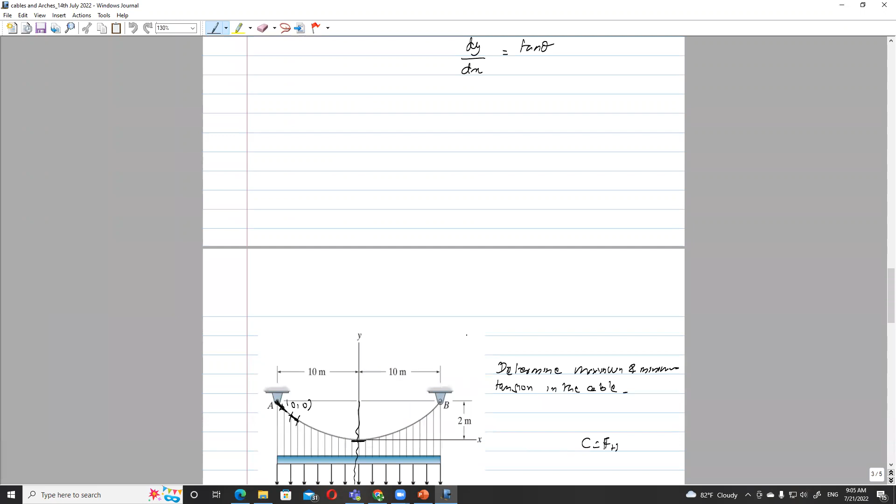Let me share the screen. So we were looking at cables and arches. The first part is cables. We have derived a few equations, and you may remember we did this problem as well. Let me once again revise the theory behind cables, and then we can continue with another problem.

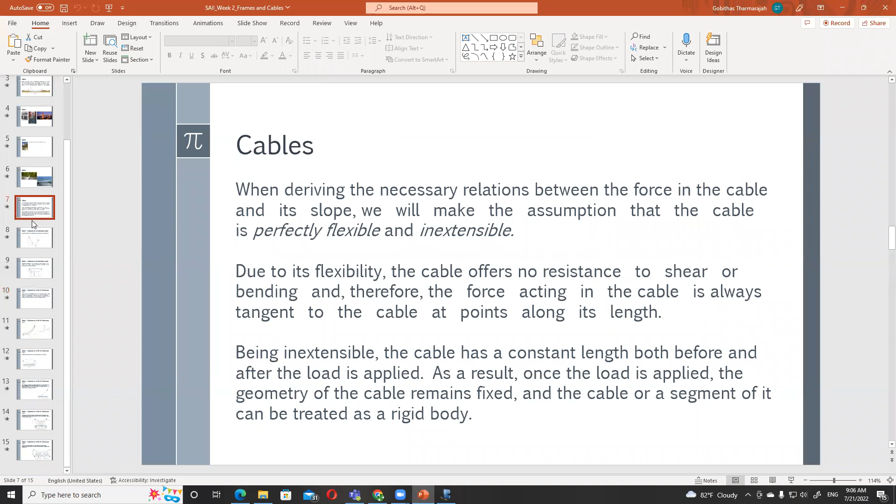Cables are a type of structure, a cable-stayed structure. When trying to find the forces acting in a cable, if you look at a cable like this, you may have tension acting on it, because cables can carry only tension, and there can be a load acting on the cable. If we consider the equilibrium of this, we can derive this equation.

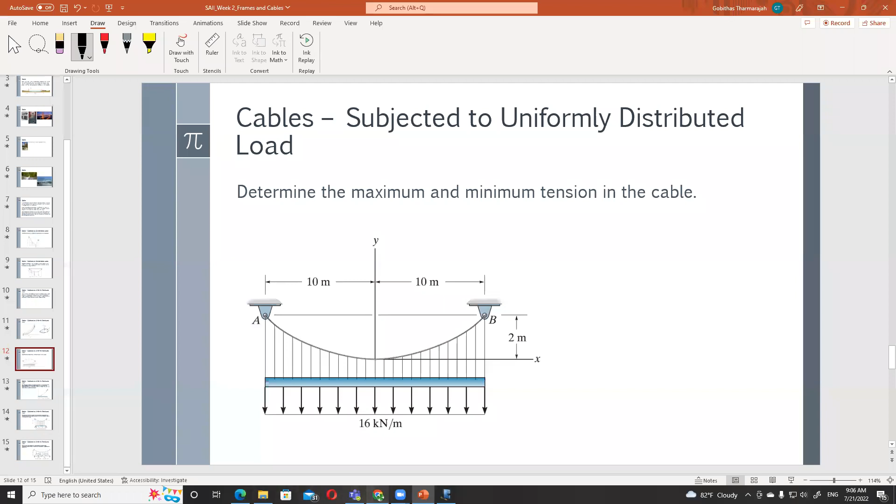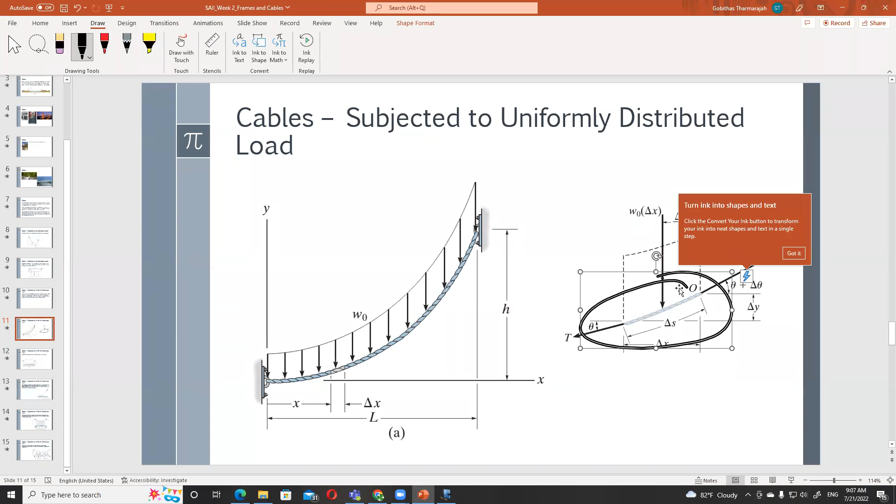So that is the equation we have derived. If you consider the equilibrium of the cable, let me copy this as well. So if you consider this, then taking it horizontally, this is the equation you have: T cos theta, this component.

T cos theta is in the negative direction. In the positive direction, T plus delta T, cos theta plus delta theta, that is equal to 0 if you consider the horizontal direction. As theta approaches 0, if you divide this by delta x, all of them, because as theta approaches 0, delta x will approach 0, this will become 0, and this will become 0, and this will become dT over dx cos theta.

So dT over dx cos theta is equal to 0. That is the first equation, as delta x approaches 0, theta will approach 0. So that is the first equation, applicable to any cable, not just this one.

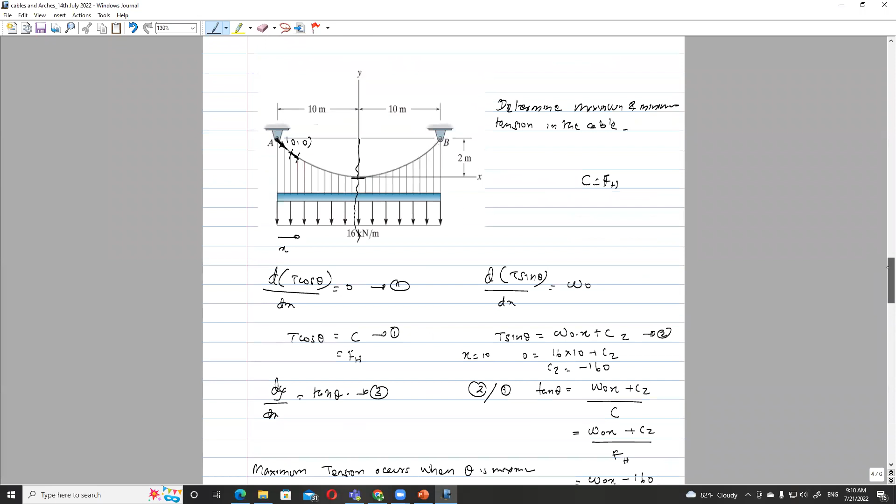So the two equations we have: equation 1 for cables is dT cos theta over dx equals 0. The other one is dT sine theta over dx equals W naught. That is equation 2.

dt sine theta over dx. This is valid for any cable. So basically we will start with this equation.

Then we need a relationship. You might remember we have derived a relationship, that is this one. This is W naught delta x into delta x by 2.

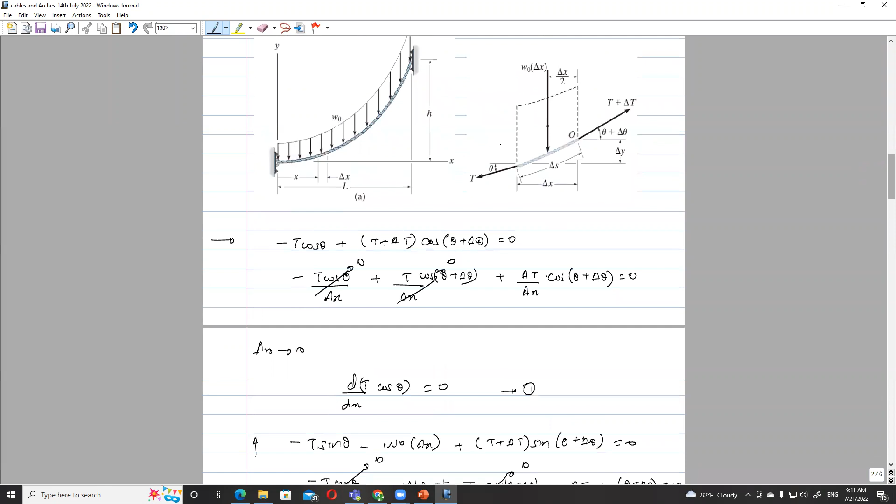That is taking moment from this point at O, so taking moment at O.

So when you do that, you have this equation, that is W naught delta x is the load and it is acting at delta x by 2, that is counterclockwise. T cos theta into delta y is clockwise, T cos theta into delta y is clockwise, and T sine theta into delta x is 0.

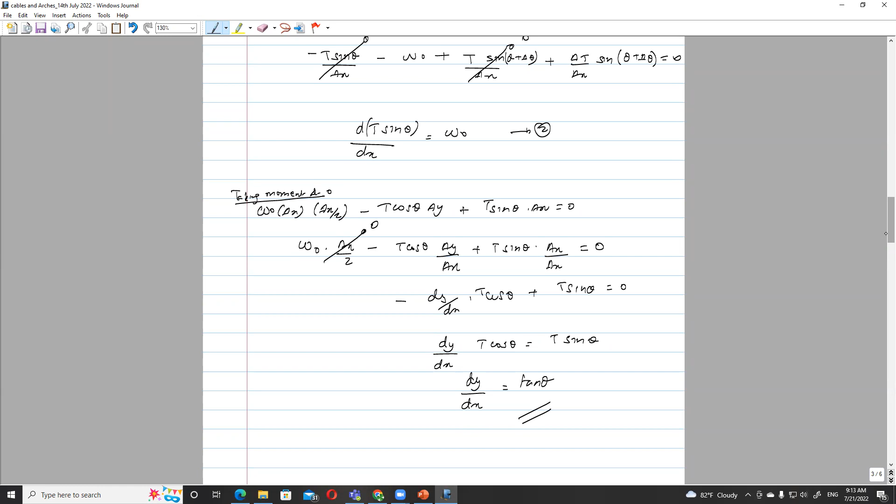Here this is t sine theta. So dy by dx t cos theta is equal to t sine theta, and we get another equation dy by dx is equal to tan theta. So the equation 3: dy by dx is equal to tan theta. So these are the three equations.

Here theta is the angle that, or when you have the parabolic or the increase of the angle in the cable. W naught is the load acting on the cable, and x and y are distance. Y is vertical distance, x is horizontal distance.

So now let's take the second problem. There's a cable AB subjected to a uniform loading of 200 Newton per meter, acting on the cable. If the weight of the cable is neglected and the slope angles at A and B are 30 and 60 degrees.

So it is not 0 here now. It is 30 here, 60 here, respectively. Determine the curve that defines the cable shape. So we need to define the cable, the curve that defines the cable shape.

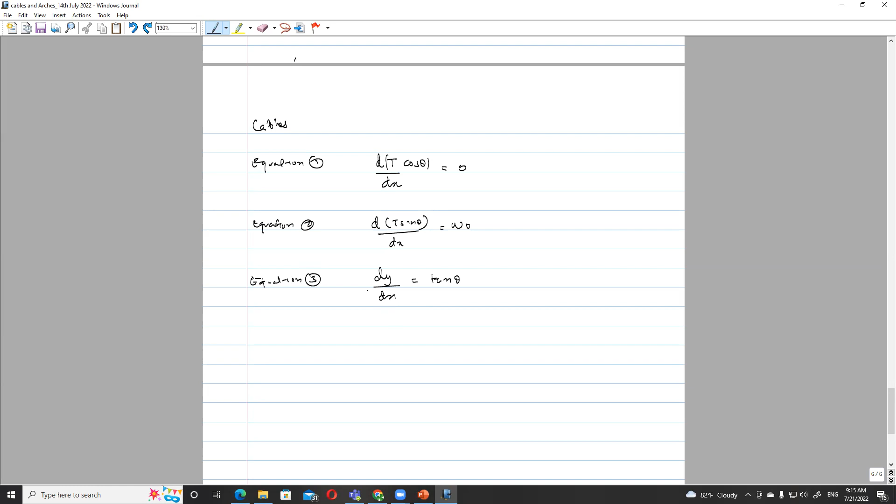So that equation will come from this y and x. If you substitute this into a format, and if you integrate, you'll get something in terms of y and x. That is the relationship we would like to derive now. And the maximum tension developed in the cable.

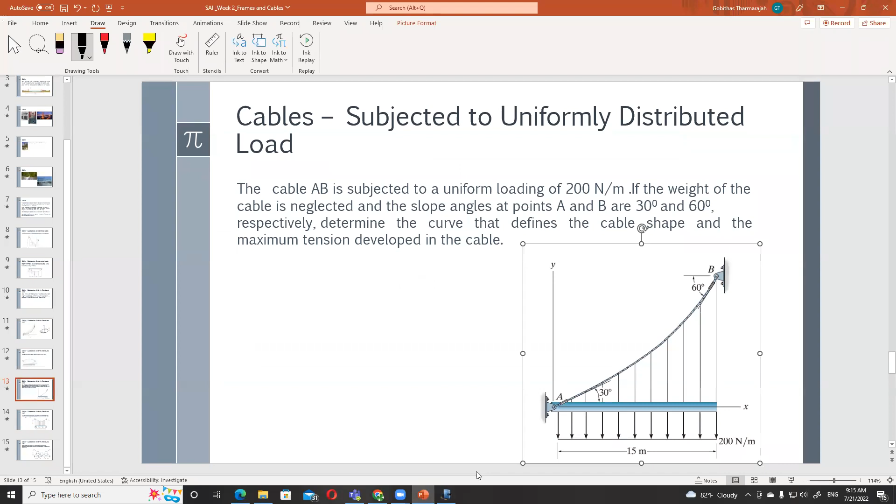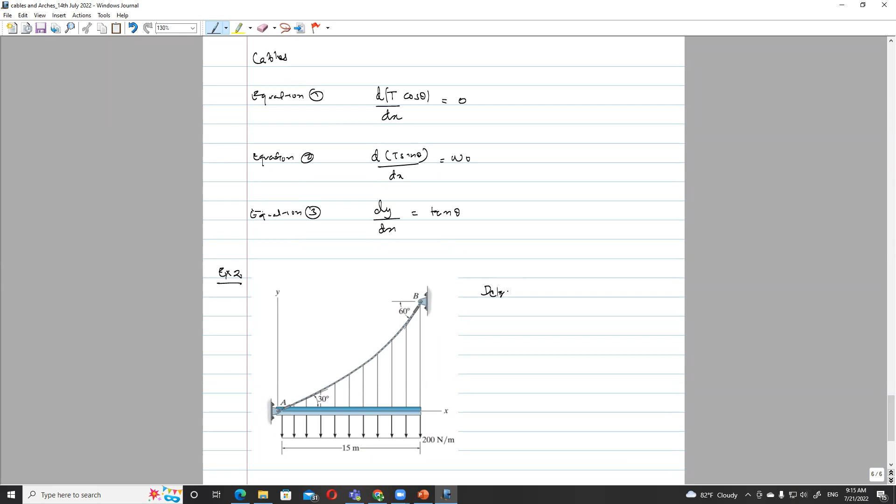So let me copy this one. Work example 2. So determine the curve that defines the cable shape and maximum tension developed in the cable.

So in this case, we know that these are the equations we have. So we need to use these equations. Now here, the load acting on this is 200 Newton per meter. So the dt sine theta over dx is W naught, which is 200.

So if you use equation 2, dt sine theta over dx is 200. If I integrate this one, t sine theta is 200 x plus c1, because I'm not integrating in a range. T sine theta is 200 x plus c1.

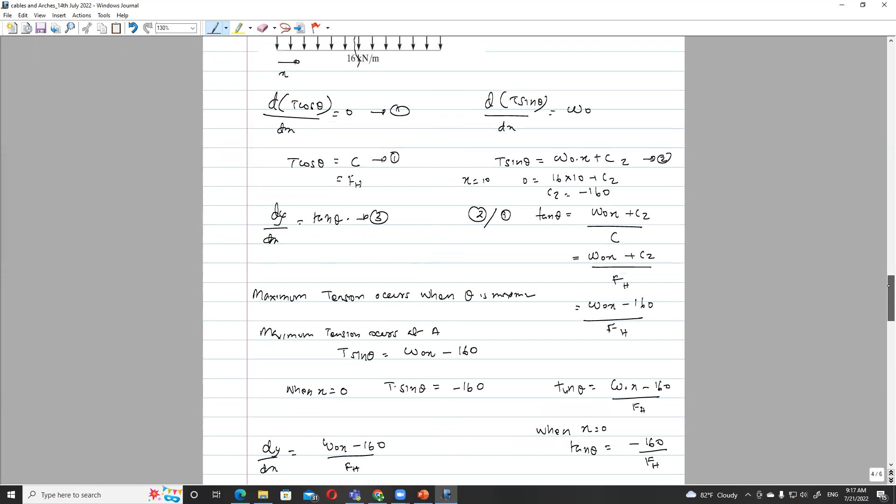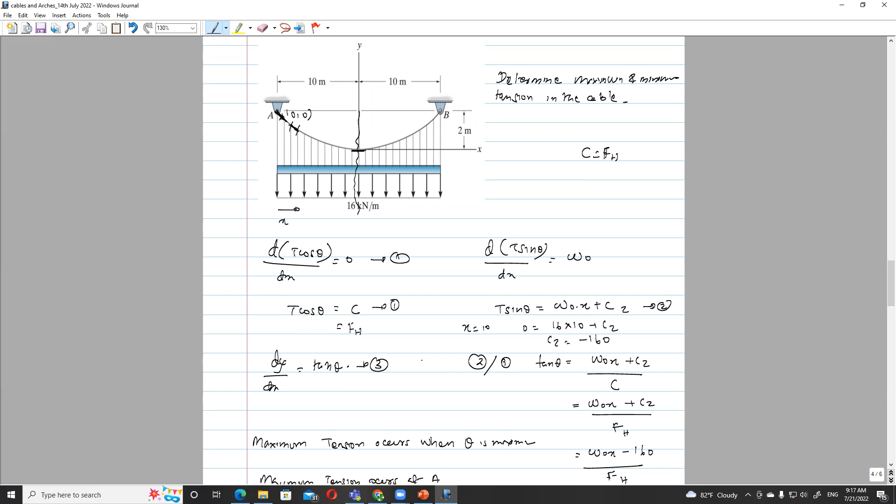You can remember that in the previous examples also we did the same way. We integrated t sine theta and t cos theta. So like that we have to work out. So t sine theta is 200 x plus c1.

Then the second equation, the first equation, if you use dt cos theta over dx, t cos theta dx is 0. That means t cos theta is equal to c2, that's a constant. That means if you take a horizontal component of the tension acting in this cable, that horizontal component is constant anywhere.

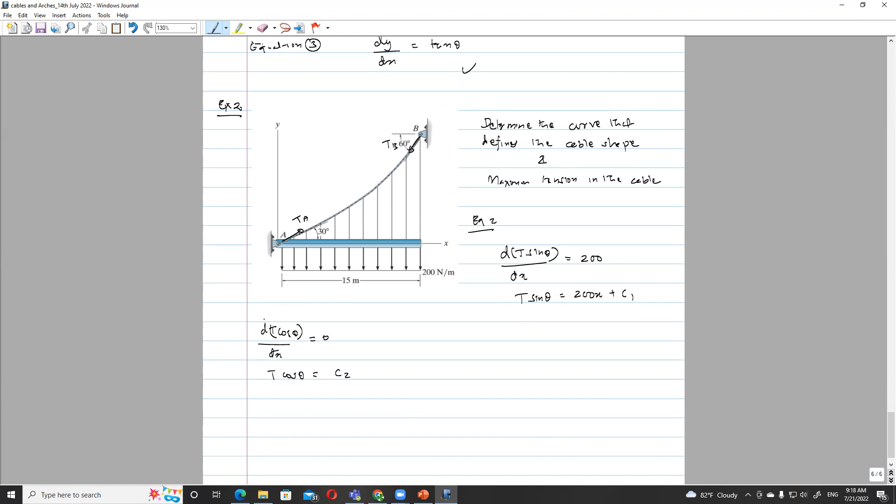So what we can do now, if you look at this tension here, there will be a tension at this point. At point A, there will be TA, and at another point there will be TB. We know the angle at these points A and B. So we can use this to find the tension value.

So T cos theta is constant. That means TA cos 30 should be equal to TB cos 60, because horizontal component in the cable anywhere is constant. So if we consider horizontal tension component, TA cos 30 is C2 and TB cos 60 is C2. Okay, that is correct.

So now we can have a relationship between TA and TB. TA cos 30 is √3/2 and TB cos 60 is half. So we have a relationship that TB is equal to √3 TA. Okay, that is one relationship.

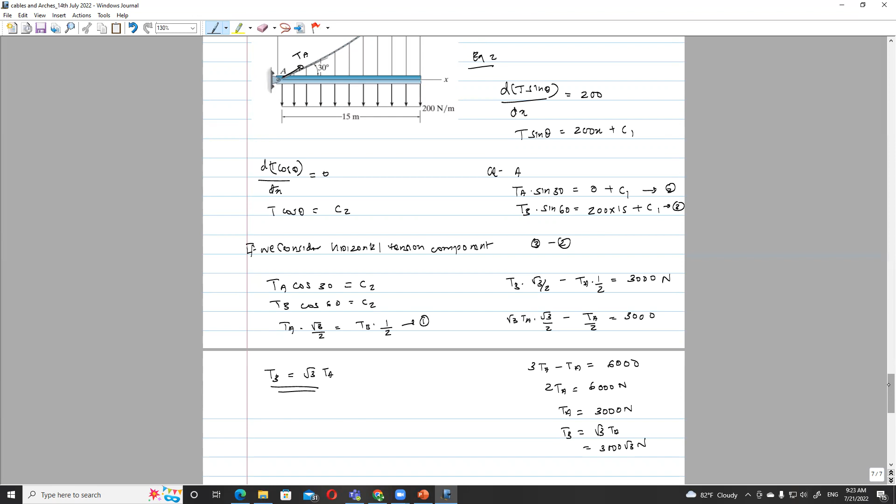So TA is less than TB. So if you look at the tension, it increases with the angle.

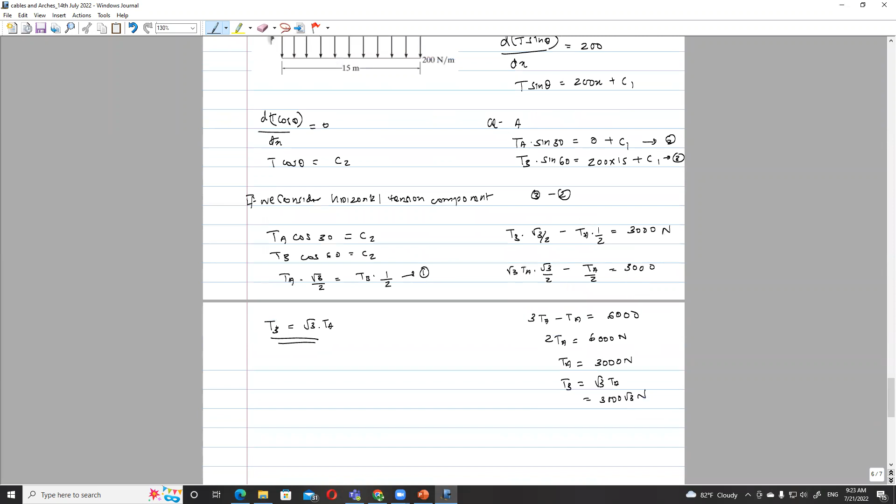So T cos theta, TA cos 30, is C2. We can find C2, and we can find C1 as well. Okay, we need that. So now we need to find C1. Before that, let us go to this equation.

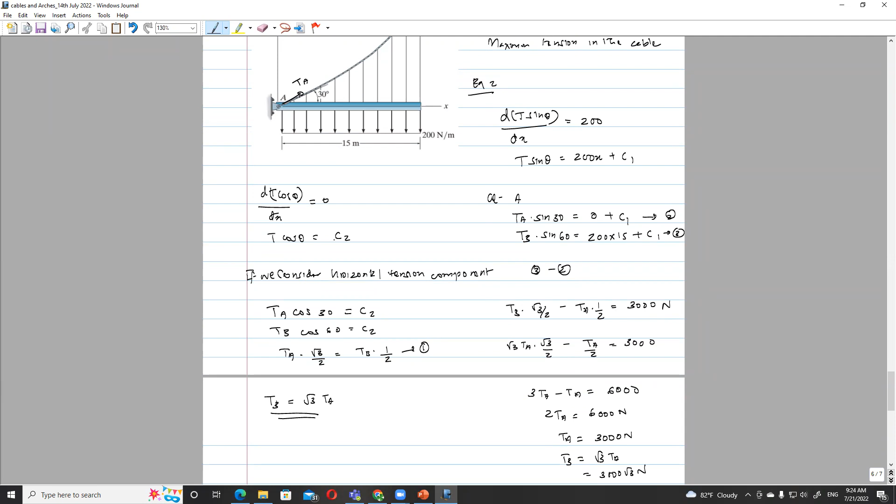That is dy by dx is equal to tan theta, that is equation 3. So if you take these two equations, T sine theta is equal to 200x plus C1, T cos theta is equal to C2. If I divide T sine theta over T cos theta, I'll get tan theta. So T sine theta is 200x plus C1, and T cos theta is C2.

Okay, so now I need to find C2. C2 is TA cos 30. TA is 3000, cos 30 is root 3 by 2, so that is 1500 root 3.

I'm sorry for the interruption. There's a drop in the signal. So now I have stopped here, right? Can someone tell me whether you disconnected before this one or at this point? At that point, pardon? Hello? Can you speak a little bit louder at this point? Yes, sir. Okay, thank you.

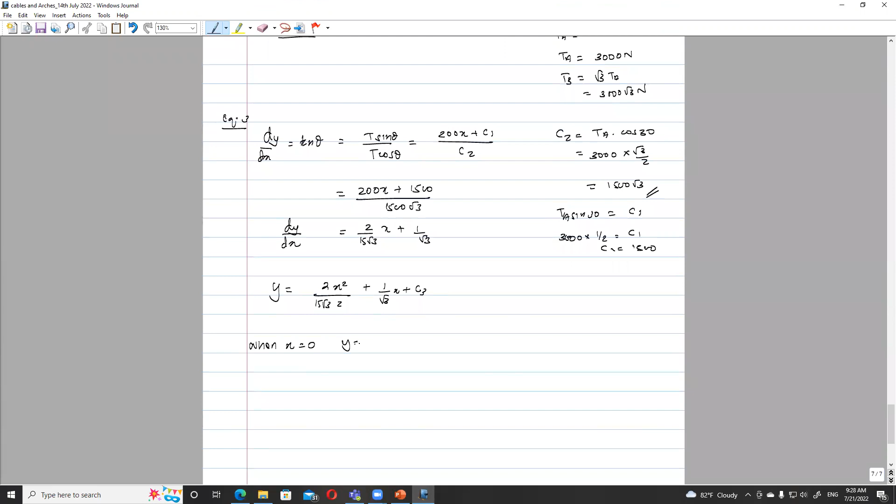Okay, so now if I integrate this once, I'll get y equal to 2x squared over 15 root 3 over 2, plus 1 over root 3 x, plus C3. Now, C3 will be determined from our boundary condition: when x is equal to 0, y is equal to 0. Therefore, C3 is 0.

So the equation governing the shape of the curve is x squared over 15 root 3 plus x over root 3. So this is the shape of the curve of the cable.

And the maximum tension in the cable—so you can see that TA is 3000.

TA is 3000 and TB is 3000 root 3. So if you look at the cable's components, there is T cos theta, which doesn't change, and T sin theta, which changes with the length x. So the maximum T sin theta value will occur when x is max. There are two equations: T cos theta is C1, which is 1500, and C2 is 1500 root 3.

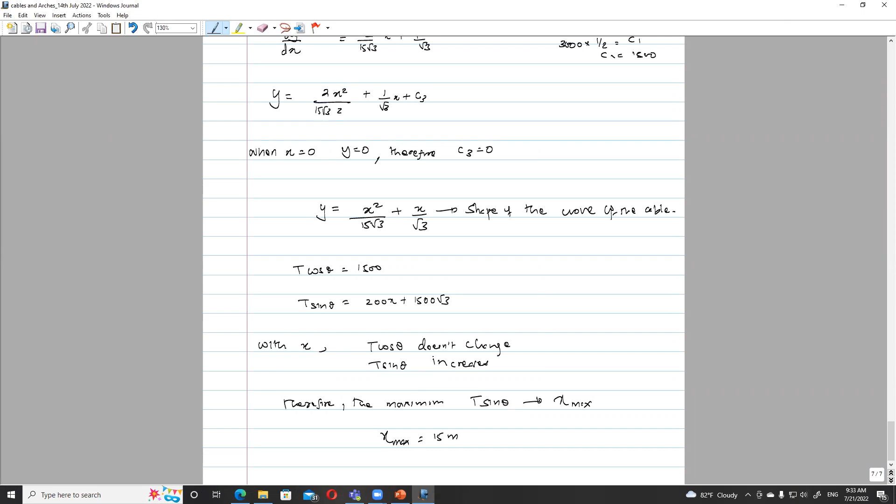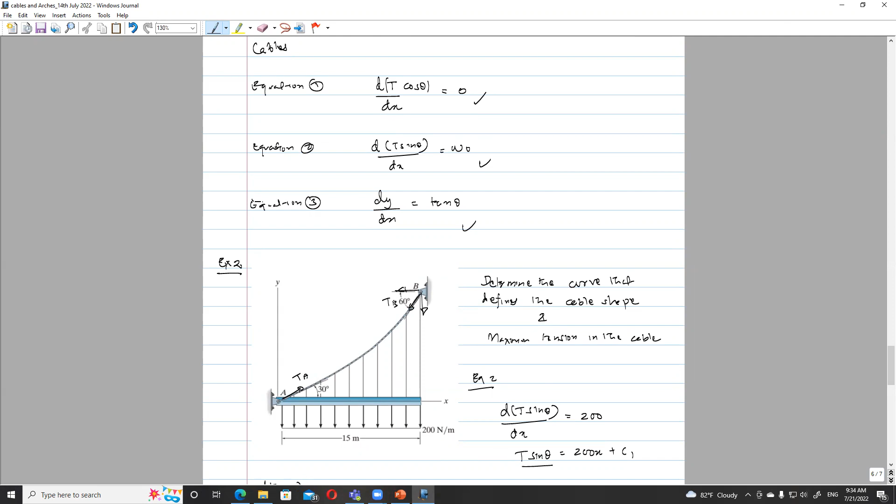So the T value: T squared cos squared theta plus T squared sin squared theta gives us the T value. There's a horizontal component and a vertical component. The vertical component increases with the length, while the horizontal component doesn't change. So the maximum tension will occur at B.

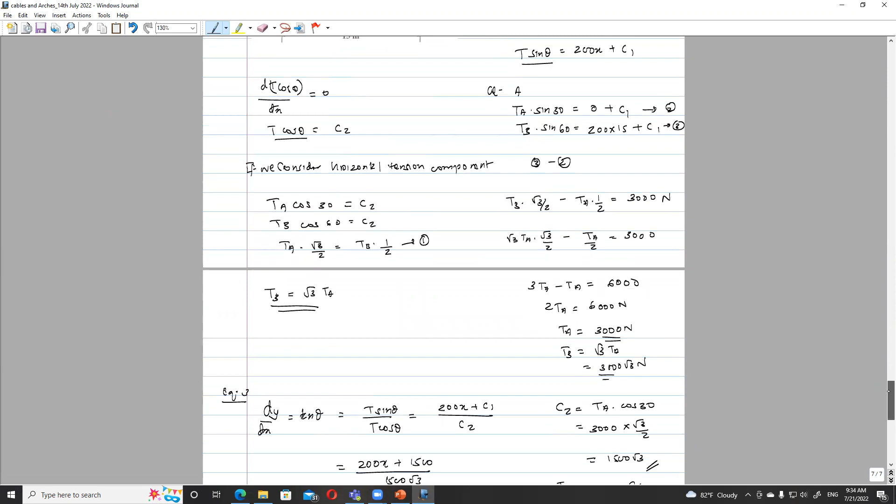Therefore, T max is equal to TB, which we already found to be 3000 root 3 Newton. So this is the maximum tension in the cable, and this is the shape of the cable, the curve of the cable, along with the maximum tension. So this is how we approach this cable problem.